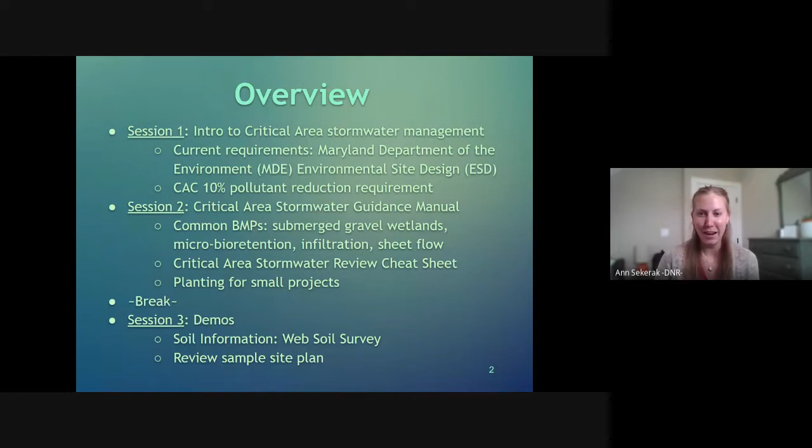Now we're going to jump into the first session, which is an introduction to critical area stormwater management. Really quickly first, we'll take a quick look at MDE's stormwater management requirements, also known as environmental site design to the maximum extent practicable, or ESD to the MEP. Even though MDE's requirements are separate from ours, we wanted to briefly touch on them because critical area stormwater management was designed to be consistent with them.

So here we go, I'm just going to go into MDE's website here. This is their stormwater management webpage, and I wanted to point out a few things. Maryland's first stormwater management law was passed in 1982 and mainly focused on controlling flooding associated with new development. The prescribed structural BMPs designed back then were meant to trap large amounts of runoff in a central area. However, over the years, it was determined that incorporating multiple smaller scale practices was more effective.

The Stormwater Management Act of 2007 established environmental site design to the maximum extent practicable, again ESD to the MEP, to require the use of small controls to mimic natural hydrology and limit the use of structural practices. Here you'll see links to MDE's regulations, as well as a link to their stormwater design manual. So there's some really good resources here on their webpage.

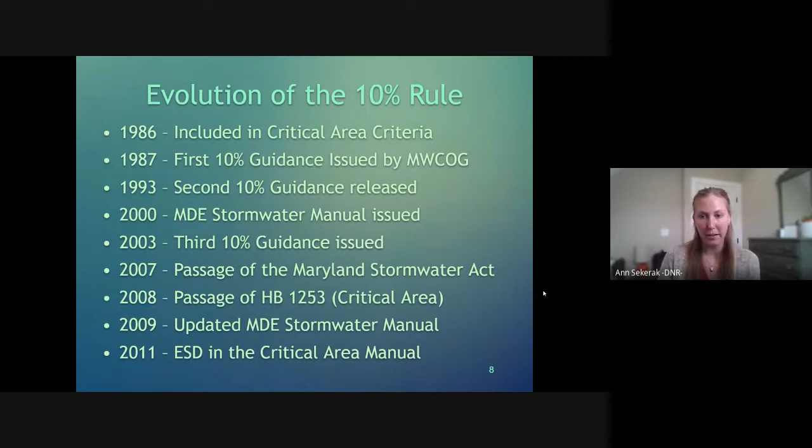So in terms of the interface between MDE and critical area requirements, there are times when one or both standards must be met. For example, as we've mentioned, critical area stormwater is required for projects in the IDA under 5,000 square feet, even though MDE stormwater is not triggered yet. When both are required, the best management practices, or BMPs, should be designed to meet MDE's ESD requirements. If the phosphorus load removed from the ESD practice is greater than the 10% pollutant reduction requirement, then the 10% rule has been met. Otherwise, additional or alternative practices may need to be implemented.

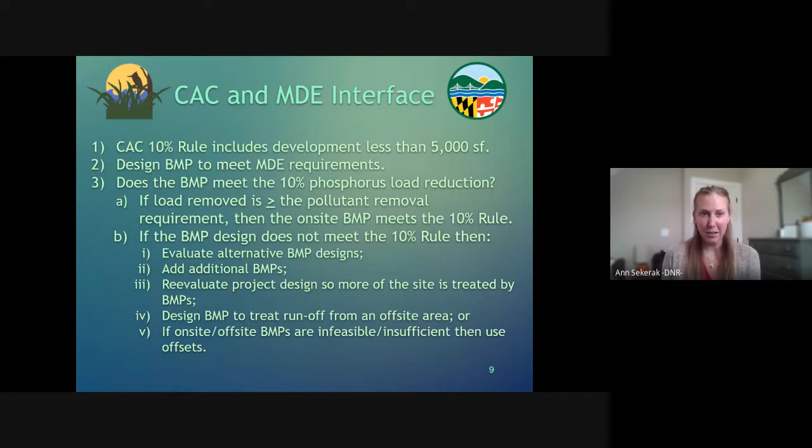And then just to keep in mind, BMPs should be part of the overall design of a project, not just an afterthought. It can be really difficult to incorporate stormwater management to meet 10% after a project is completely designed. And then also make sure that the 10% spreadsheet is filled out and submitted for any project where critical area stormwater is required, even if the removal requirement is met with ESD, because it serves as verification that the critical area requirement has indeed been met. And we'll get into more detail about that spreadsheet in a bit.

So in addition to the overall 10% pollutant reduction requirement, there's an additional requirement for redevelopment. MDE has specific requirements in COMAR for redevelopment called Impervious Area Requiring Treatment, or IART. It basically specifies a 50% reduction in impervious surface below existing conditions. Because it's typically impractical to actually remove 50% of existing impervious, environmental site design practices, or ESD to the MEP, can be used to meet the equivalent in water quality control of a 50% decrease in impervious surface. This redevelopment requirement provides a way to address existing untreated impervious area.

And so, to be consistent with MDE, the critical area also has a redevelopment requirement, but it's related to phosphorus removal, not impervious surface. So the 10% spreadsheet, which again, I'll get into more detail in the next slide, automatically calculates the average annual pre-development load based on whether the project is new development or a redevelopment site. Redevelopment rules apply if the existing site is more than 40% impervious cover. The phosphorus removal requirement for redevelopment sites is to reduce the pre-development phosphorus load by 50%. But again, this is automatically calculated when you enter the information into the spreadsheet.

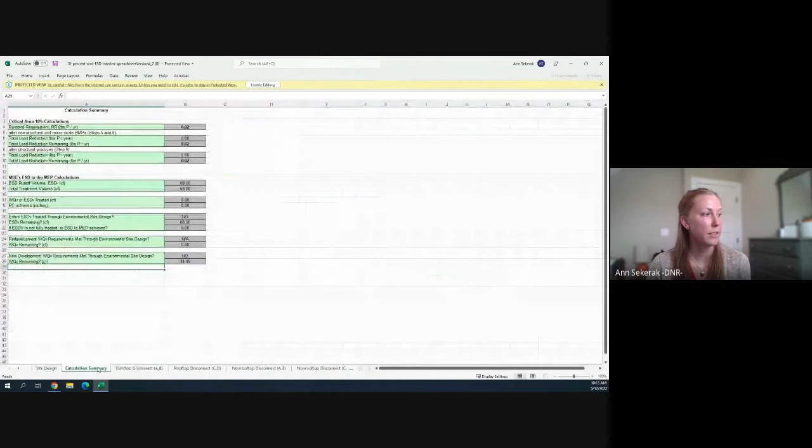So here we are, and let me see if I can zoom in a smidge. So again, this is our spreadsheet, the 10% pollutant reduction spreadsheet, and the blue cells are the cells that you input information. So that's what you fill out. The gray cells are automatically populated with formulas. And then down here, you'll notice that there's various tabs. So the second tab down here is a summary tab that just provides a quick snapshot to see if the reduction requirement has been met.

And then there are these various other tabs down here for the different types of best management practices or BMPs that you may be considering using on a site or that you're using on the site, and you have to insert those specifications for that specific BMP. This spreadsheet enables designers to find the most cost-effective combination of ESD practices that comply with ESD and this critical area 10% requirement. And it adjusts the effectiveness of proposed ESD practices based on the individual BMP specifications.

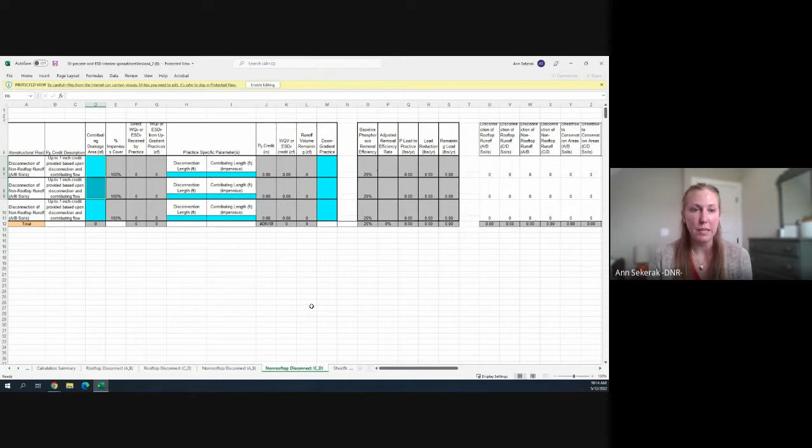So that was just a really quick overview of it. But again, we're going to get into more detail and go through some examples later on today.

All right. And so as an alternative to on-site or off-site BMPs, some jurisdictions have a fee in lieu program for stormwater management. The current fee in lieu rate is $35,000 per pound of phosphorus. The Critical Area Guidance Manual has a different amount, but that's from 2011, and MDE has since updated that value to be $35,000 per pound. And you have to set up a program to manage, track, and implement fee in lieu, and that account has to be separate from any other fee in lieu accounts that you may have in the county.

And then also the Critical Area Stormwater Management Manual on our website has guidance for the use of planting offsets, but we'll get into more detail again about that and the guidance manual itself in the next session. So that is it for just a quick, very large overview of critical area stormwater management and MDE's ESD requirements. Are there any questions before we move on to the next session?

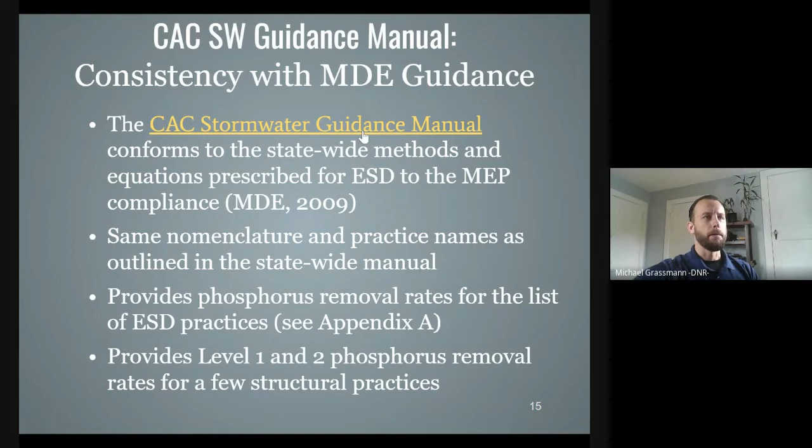I'm going to attempt to show you where this is located on our website. All right, so far so good. So this is our website, which you'll find in Critical Area. Once you get onto the landing page, you'll see on the left-hand side there are a number of different categories you can click on. Go to Stormwater Management, just like you did earlier when Annie was showing you how to access the spreadsheet. And then if you wanted to look at the IDA 10% Stormwater Manual, it'd be at the top of this column right here. And here we go. Environmental site design criteria for Maryland's critical area.

I'm not going to go through this in great detail, but I'll just go over quickly what you're going to find in this manual. So we have an introduction, which talks about the critical area and the buffer, evolution of stormwater management practices in the critical area, why this edition was created, and some of the differences between this and the 2011 edition. In part 2, a lot of the frequently asked questions on basic stormwater management design and policies will be addressed.

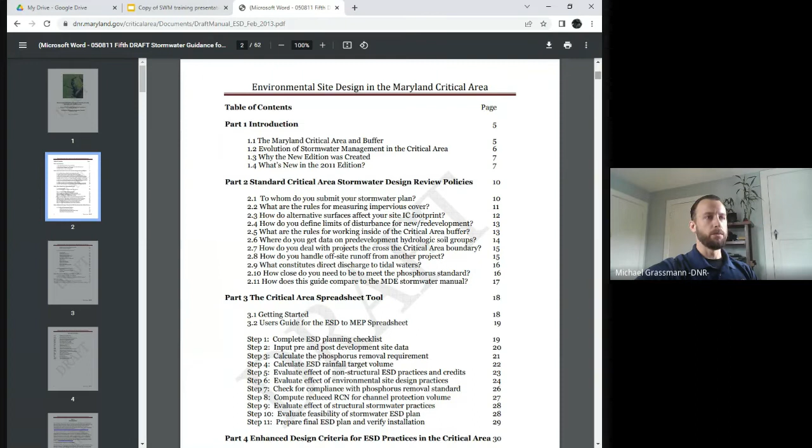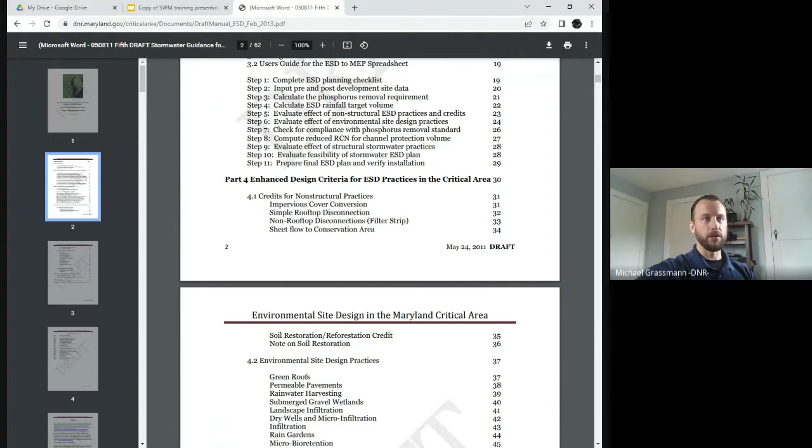Moving into part 3, we go into the spreadsheet tool, which Annie covered in the previous session. And part 4 talks a bit more about the actual BMPs and some of the practices and specifics that you're going to find on different BMPs in the critical area. Then part 5, as mentioned, goes into offsets and different offsite compliance that you can apply for stormwater management in the critical area. And references cited, the appendix that summarizes some of the phosphate removal rates for the critical area, and different documentations are Appendix A and B.

And as we mentioned earlier, if there are any questions at all as we go through this, especially as I start touching on some of the BMPs, we encourage interaction. So feel free to jump in on the chat or just raise your hand or just cut me off if I'm rambling.

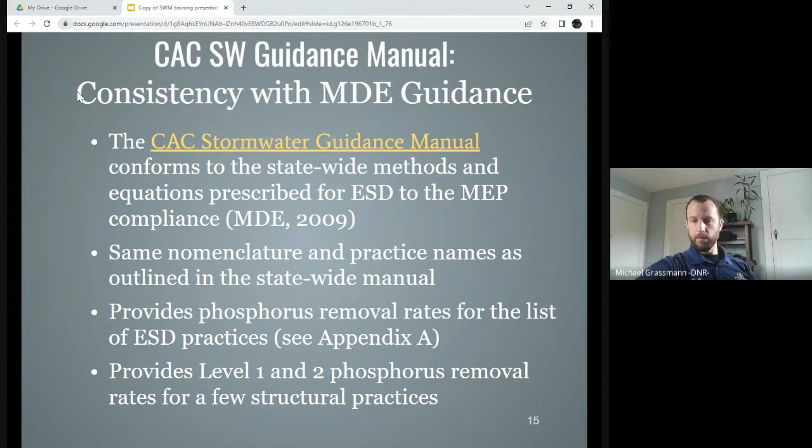Can we consider that guidance final? And Aaron had a question. Yes. So the 2003 guidance was our original stormwater management guidance manual, which was approved by the commission. The 2011 version, which is on our website, was never officially brought back to the commission for approval. However, it was updated basically to reflect MDE's change to environmental site design requirements. So the 2011 version is the best one to use because it reflects the requirements currently under MDE's Chapter 5, their ESD chapter.

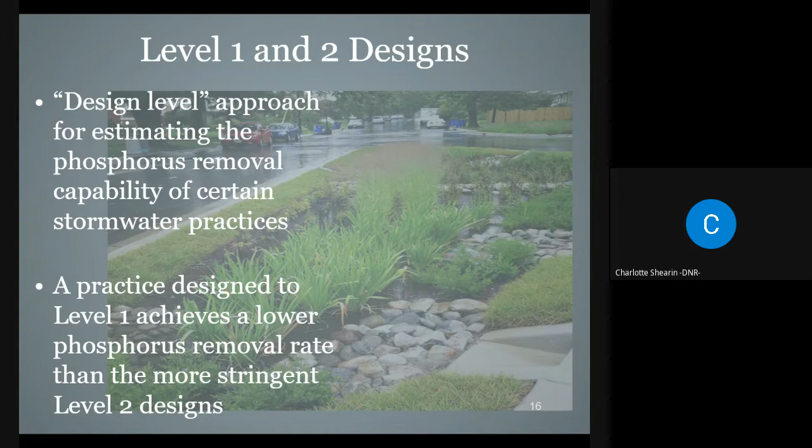Does that answer your question, Aaron? Yes, I believe so. The 2011 would be, yeah. Aaron asked if there was any conflict between the 2003 and the 2011, we should refer to the 2011 one. That would be correct, yes. Right. Sure. Cool. Yep. Great question.

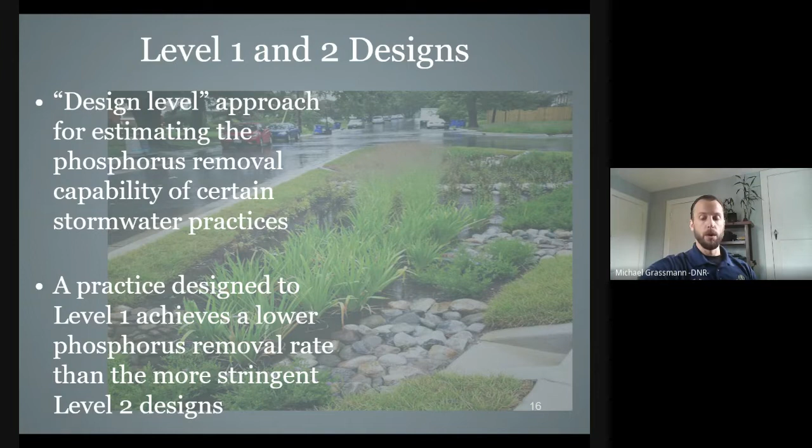Good question. So briefly touch on level 1 and level 2 designs. As mentioned on the slide, the design level approach is for estimating phosphate or phosphorus removal capacity of certain stormwater management practices. Level 1 achieves lower phosphate removal, and level 2 has more stringent design capacity. We're just touching on this. This is generally something that planners will not come across, but it is mentioned in the stormwater manual, so it's something that we wanted to just touch upon.

And again, level 1 design equates to MDE's minimum design standards and criteria for environmental site design practices, while a level 2 design has a much more enhanced list of design features, which will maximize phosphorus removal. But once again, typically we won't see a level 1, level 2 design differentiation in a lot of the plans that come into our office for review.

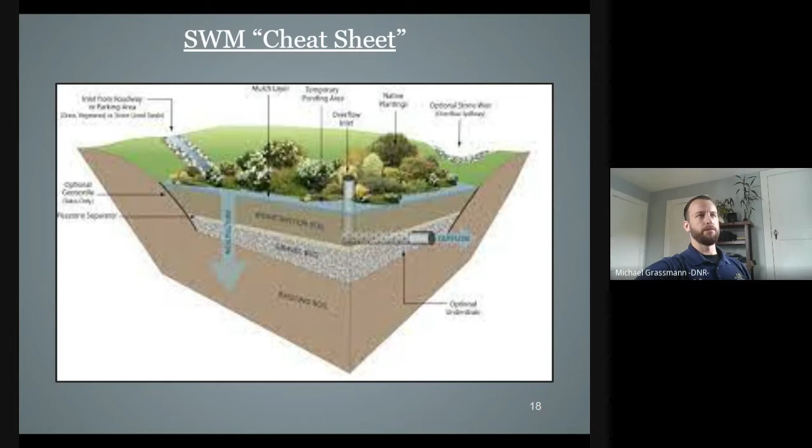So our stormwater cheat sheet. Now, this is completely separate from the stormwater guidance manual. And I believe, did this go out in the earlier email to everybody? Did we get that out, or are we going to send it out after this? Nope, it was included in Susan's email with the attachments. Okay. Yep. Excellent. So if people have this available, you're welcome to follow along, since there is a lot of information on this. And it is a very handy resource that Charlotte put together.

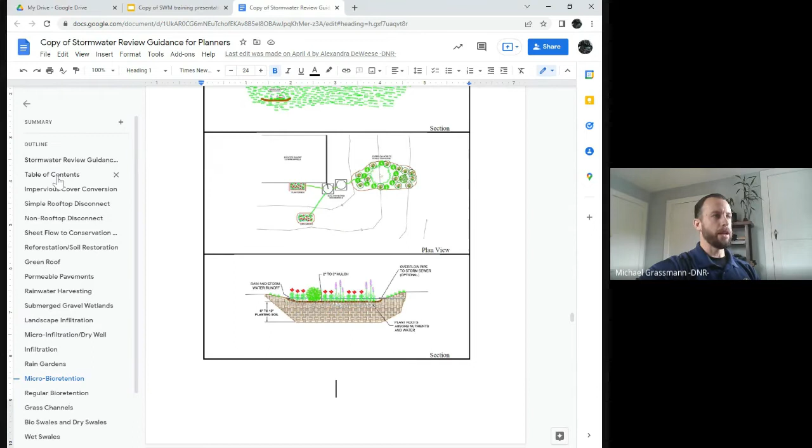I am not going to go into a huge amount of detail on all of this because it is very comprehensive, but it is a great resource if you're reviewing some plans. It is important to note that we are not stormwater engineers, right? This is one of the reasons why we have something like this.

Basically, if something like this comes into our office, this document will allow us to better review the BMPs in order to ensure they meet the specific requirements, because some of these BMPs do have very specific criteria in order for them to be effective and achieve what they're designed to do. So when going over some of these, it's important to look at this reference or resource and make sure that the BMPs being proposed are going to meet the specifications.

One thing you'll find that's common in most of these, there's a few criteria listed under each practice. You'll have environment or location, soil types it's best used for, construction specifications, things that it is recommended for, and definitely things to be aware of or that it is not recommended for. Those are typically highlighted in red or italics when you're going through this.

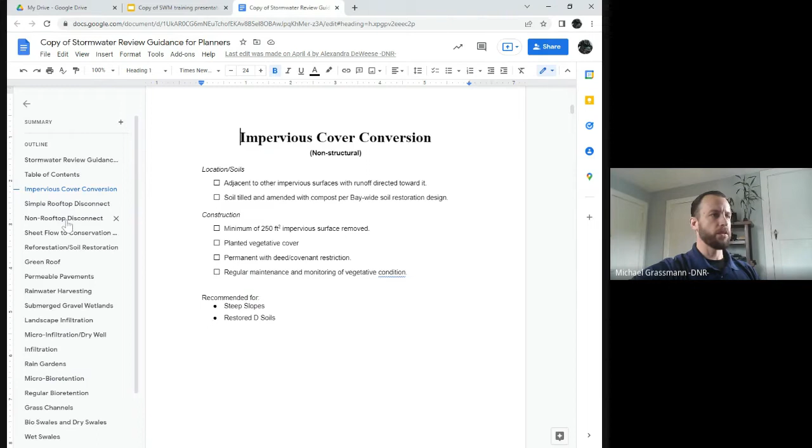I'm not going to really talk about the simple rooftop disconnect or the non-rooftop disconnects right now, because we'll go into that in a little bit more detail later on in this presentation.

So we'll start with sheet flow conservation area. It's highlighted here in the location information that tidal and non-tidal wetlands themselves should not be included in the calculation of the 20,000 square foot area and the 50-foot width requirements listed in the construction specs, because of lack of infiltration.

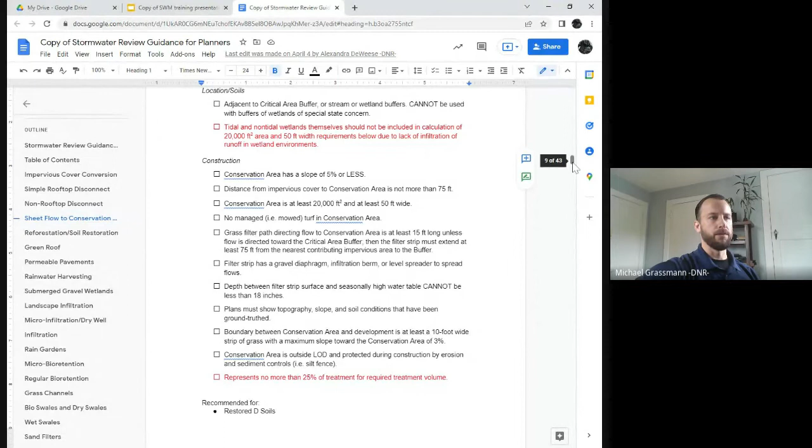Really important to pay attention to some of these specifications, because it talks about depth between filter strips, the fact that this cannot represent more than 25% of the treatment area for required volume, and is recommended for restored soils. So if it's not in the right soil type, this should not be applied.

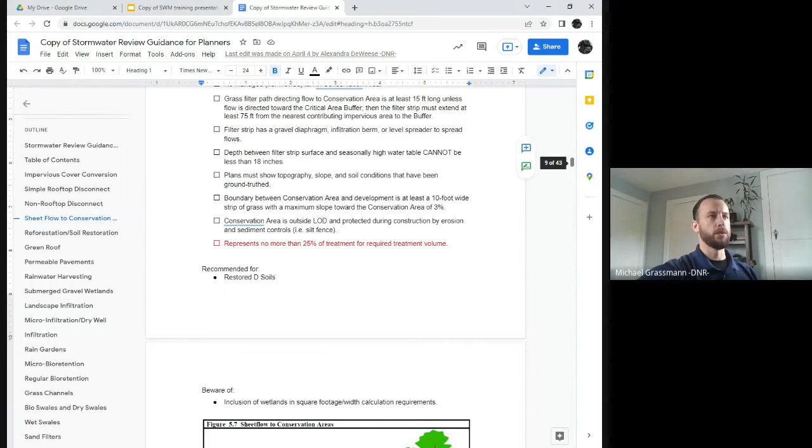There's a filter strip that should be part of the construction specs, with a gravel diaphragm, infiltration berm. So there's a lot that needs to go into this.

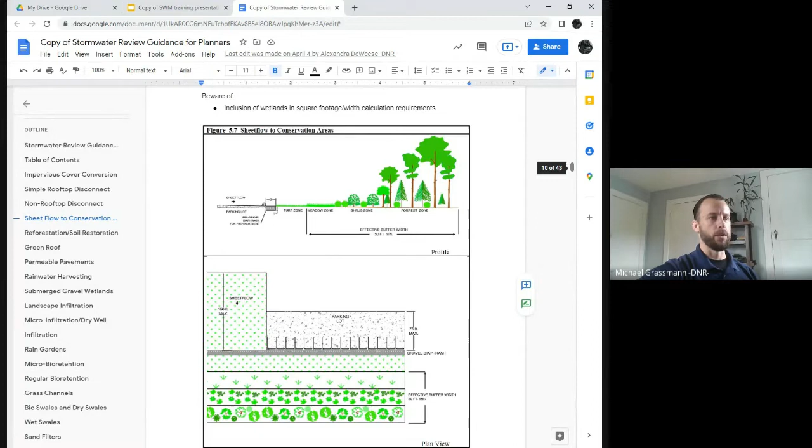Each one of these BMPs also has a very handy graphic to help further explain what it is best used for and how it's best applied. Sheet flow to a conservation area is typically something you'll see in a slightly more industrial area, where you'll have a large parking lot or whatnot, and a slope where this is going to run off into your effective area, and you must maintain certain buffer widths in order to make this effective.

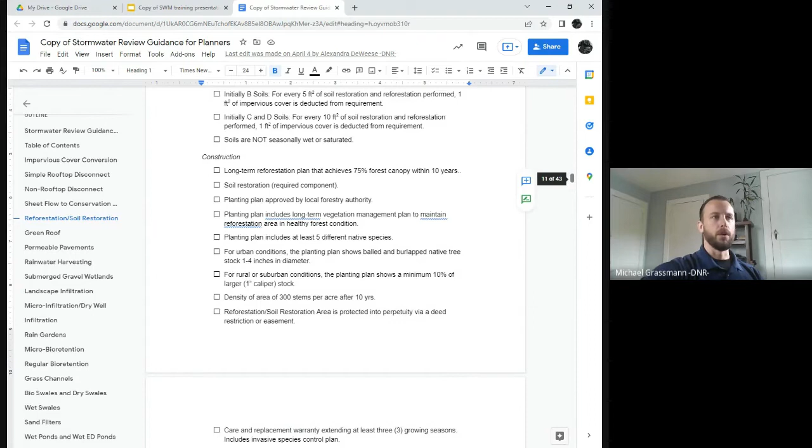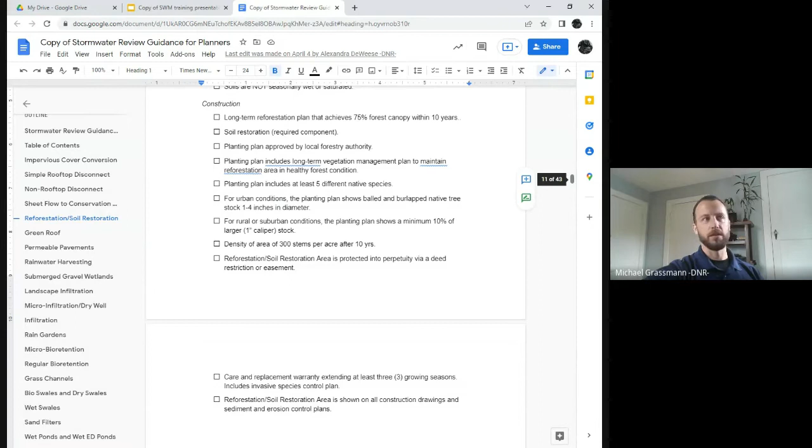So if somebody is going to propose this practice, it is very important to make sure that you're looking at these construction specs and making sure that they're meeting all of the monitoring, care, and replacement easements that would go along with reforestation for a stormwater management practice.

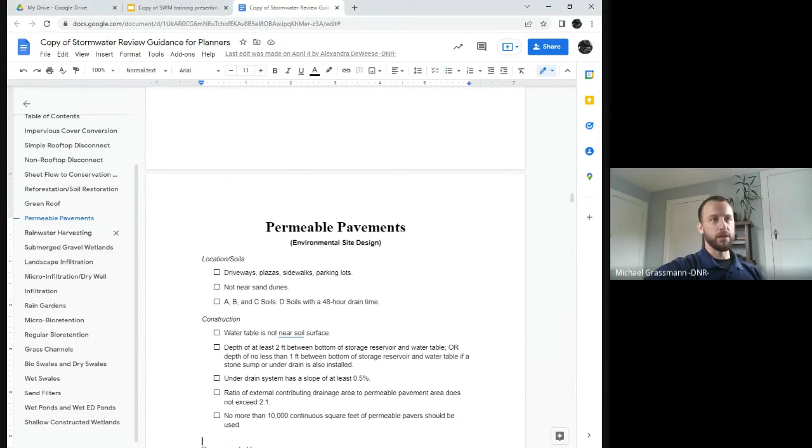Going to skip to permeable pavers, because that's something we do see quite often come in, or we suggest sometimes as a best management practice when people are having difficulties achieving stormwater management on site. It's very good for driveways, plazas, sidewalks, and whatnot if people can afford to put them in.

You have to be careful about what soils you're going to put them in, what the water table is for the area where they're going to be established. It's important to look at the ratio of the external contributing drainage area to the area of permeable pavers to be put in. It cannot exceed a 2-to-1 ratio.

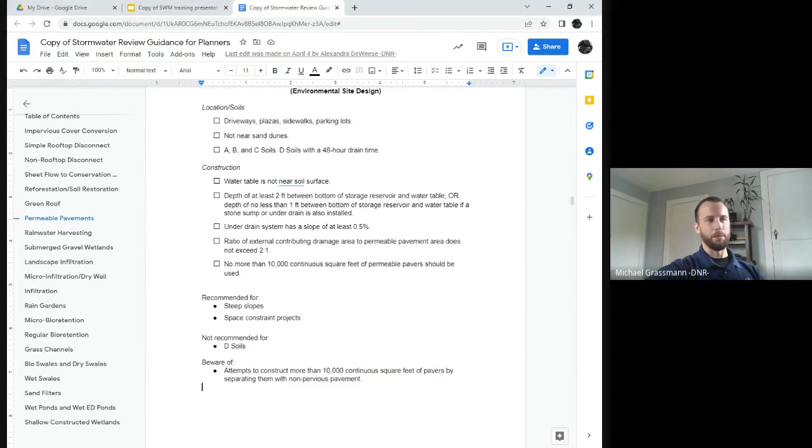Also, one of the cautions listed is that you can't have more than 10,000 continuous square feet of permeable pavers when putting this in. And you should be aware that some contractors may attempt to be clever by separating the 10,000 continuous square feet of pavers with a few non-pervious pavers or pavement in there. Examples of pervious pavers are listed.

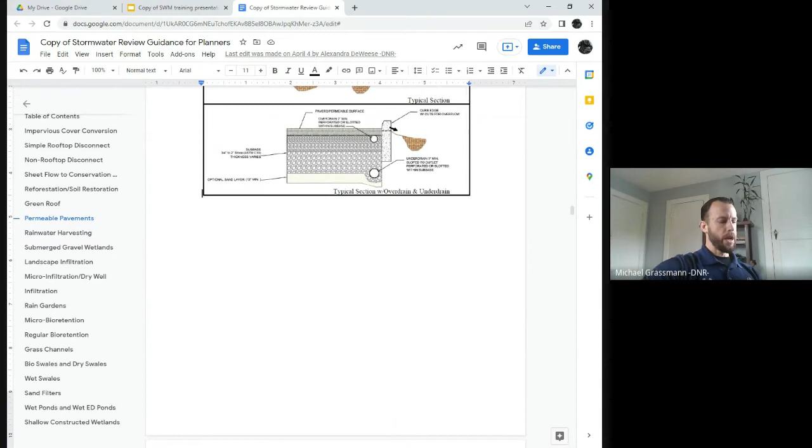Skipping over submerged gravel wetlands because this is another one I'm going to go into a little bit more detail on in future slides.

All right, all over the place here.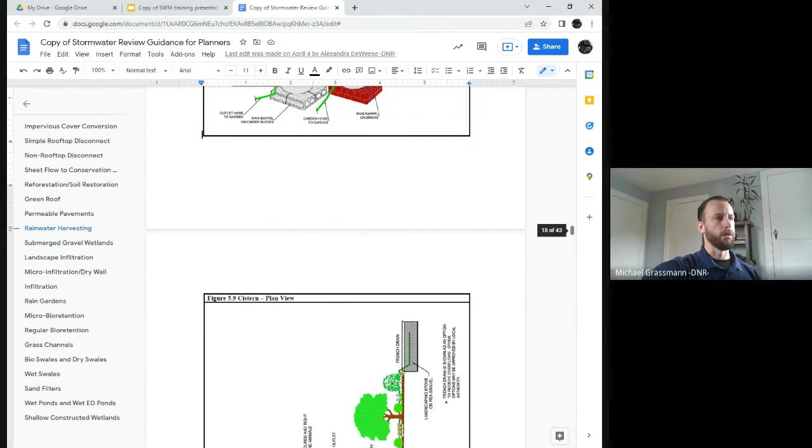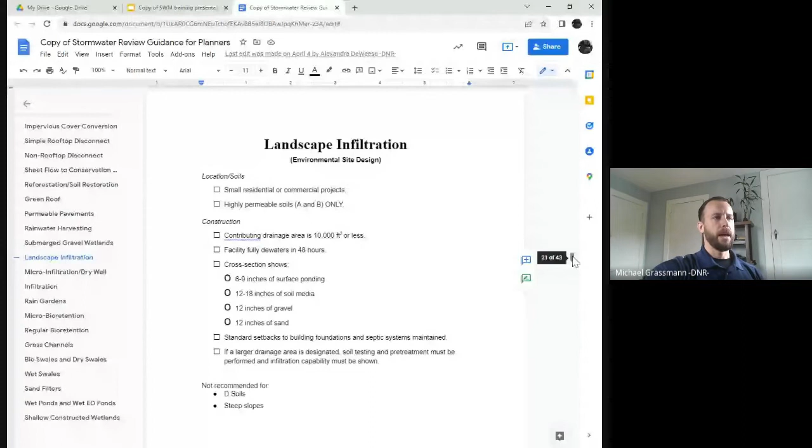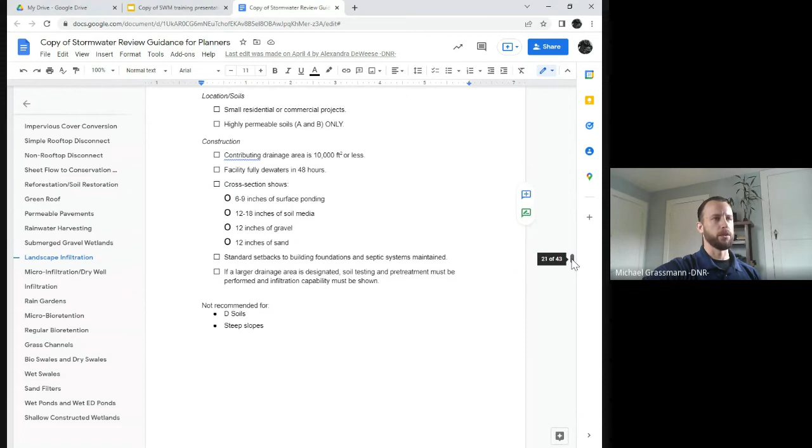Landscape infiltration, again, is something that's recommended for small residential or smaller commercial projects, and it has to have highly permeable soils to be effective. One of the important things to consider here are the different media and layers you're going to have in order to make this an effective BMP in terms of surface ponding, soil media, gravel, sand, etc. So if you do have a plan like this come across your desk, please take some particular notes about this. You also have to have a certain minimum distance between where the home is going to be and where the landscape infiltration area is going to be.

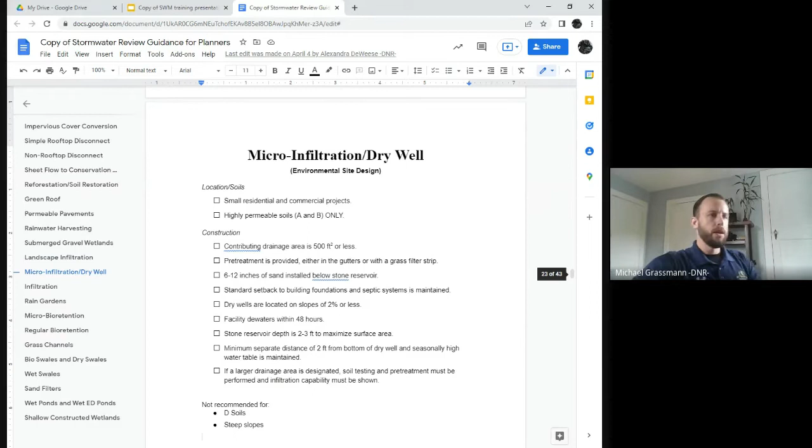Moving on to micro infiltration and dry wells, another small residential or commercial project area. Be aware of the contributing drainage area because it has to be less than about 500 square feet. There should be some pre-treatment that goes along with it, either through gutters or a grass filter strip, and some media installed as a reservoir. We have a good graphic here with your rooftop runoff and the splash block that goes into it.

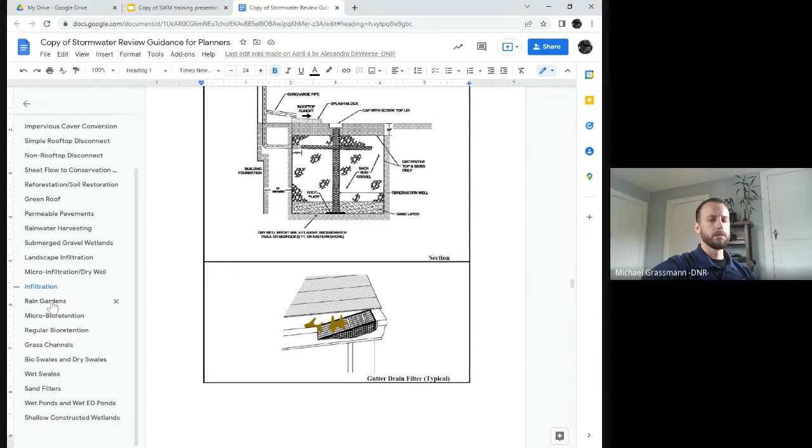We're always a big fan of rain gardens. It's a great environmental site design practice to put in. One of the things that's really important to highlight about rain gardens is that there needs to be information conveyed about this, especially if the property changes hands. The coordinates of the rain garden should be recorded, and there should be some kind of covenant or right of way that goes along with it, because if this is a stormwater management practice tied to a property or residence, we want to make sure that if the property changes hands, the rain garden isn't just going to be removed because people don't like it or don't want to have it there. So it's not just an aesthetic feature; it is an actual BMP that needs to be kept and maintained.

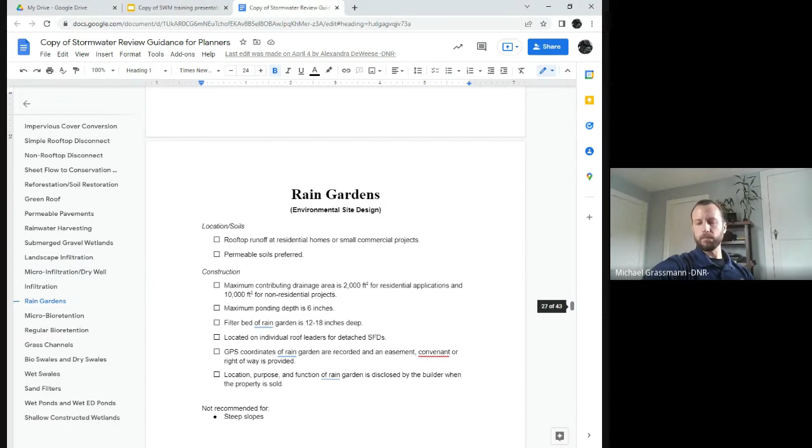Do people really, I mean, are other municipalities really doing a deed restriction on a rain garden?

There are various ways to handle it, including maintenance requirements on plats and things like that. But inspections related to stormwater management, I know, are difficult—jurisdictions don't necessarily have the manpower to go out and look at every single rain garden that was put in for a development project. But having at least notes on the plat related to what's required of the stormwater devices on site is at least one way to address it.

It looks like Aaron Harding from Cecil added in the chat that an inspection and maintenance agreement is required for the stormwater management ordinance, and inspections are required by the MS4 permit. Right, but that's under stormwater management guidelines.

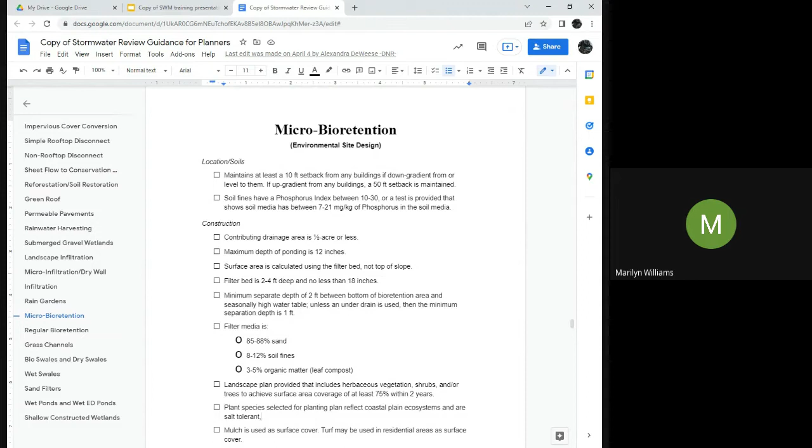So you don't have anything separate as far as a model stormwater agreement. We can use the same stormwater management agreement with MDE, but if you don't have a model to use—if you have a case where critical area stormwater is required but MDE stormwater is not—I think you could use similar plat notes and similar language to what's used for MDE requirements.

Aaron said that in Cecil, they would typically wrap it into the stormwater management plan review.

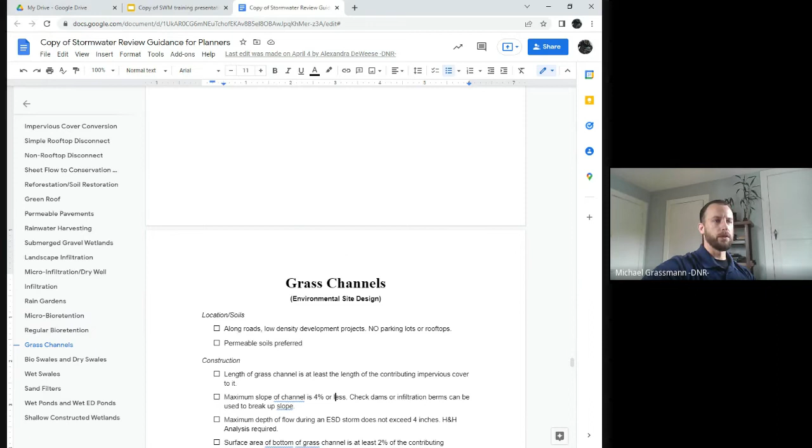I'm just going to go quickly over grass channels and swales. These are other BMPs we often see. A grass channel is seen along a road, in low density development projects. This should not be used for any kind of parking lot or rooftop. You have to have permeable soils here.

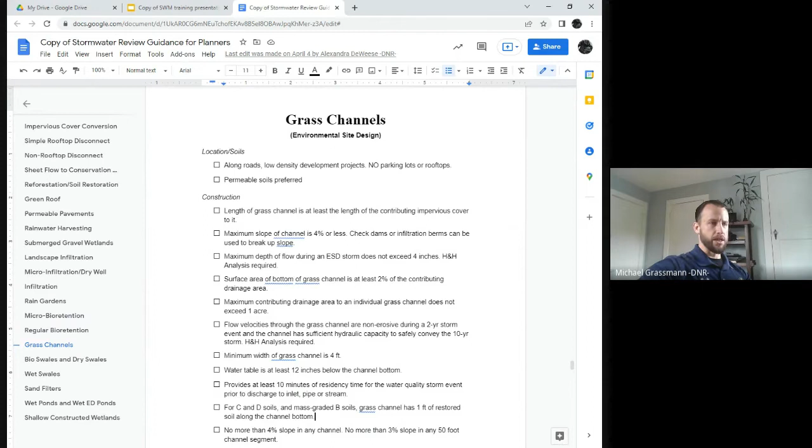Paying attention to the slope on all of these is very important to make it an effective BMP — maximum contributing drainage area, flow velocities. So it's a little more complicated than just digging a ditch and hoping that it's going to be effective as a BMP.

Once again, as shown earlier with some BMPs, this can only represent no more than 25% of the treatment area required for the treatment volume.

As we get into bioswales, dry swales versus wet swales, some of the major differences are in the environments these are used in. For a bio dry swale, very similar to grass swales, having filter media incorporated is one of the main differences. But you also have to look at ponding depth, maximum flow depth, slope, comparing the length of the channel in terms of the contributing impervious cover it's supposed to be treating, and having setbacks from residential roads.

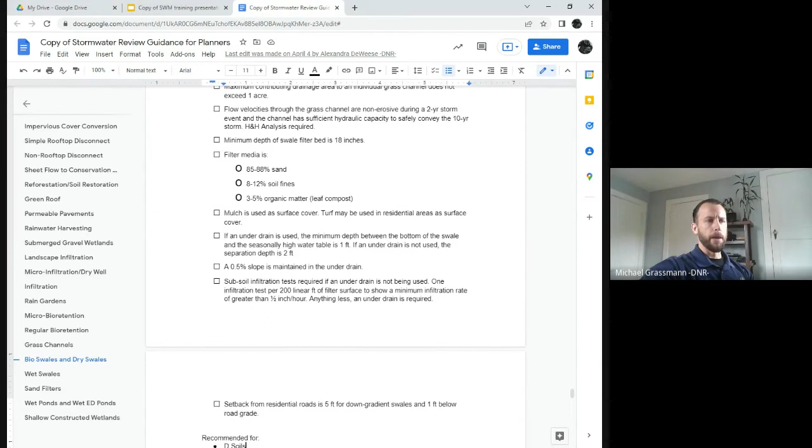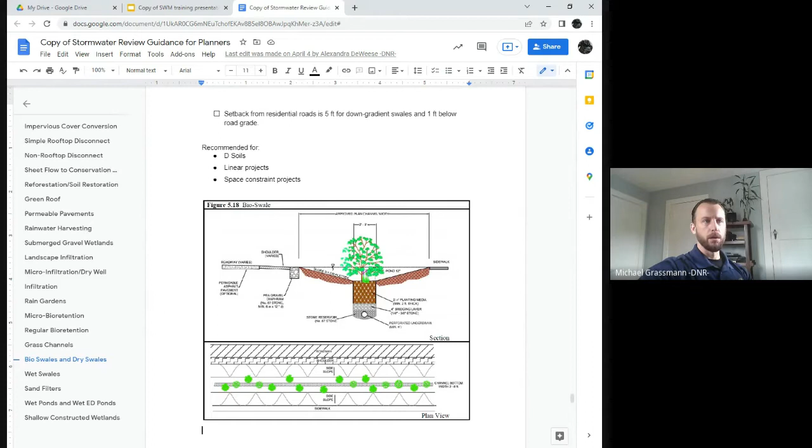The main difference for your wet swale is that it has a much higher water table. Again, this is for a non-residential area, and you have to pay a lot more attention to your surface drainage area and flow velocities through different storm events.

The last few BMPs covered in this cheat sheet are more conventional stormwater practices. Sand filters, you're going to see in contamination hotspots, brownfields, and redevelopment sites in much more urban areas that have groundwater contamination risks.

The wet ponds and wet extended detention ponds — we do not typically recommend them for practice in the critical area.

And then your shallow constructed wetlands, as a conventional stormwater practice, are something you're going to see in areas where the water table is much closer to the surface, so be aware of the different construction specs for those.

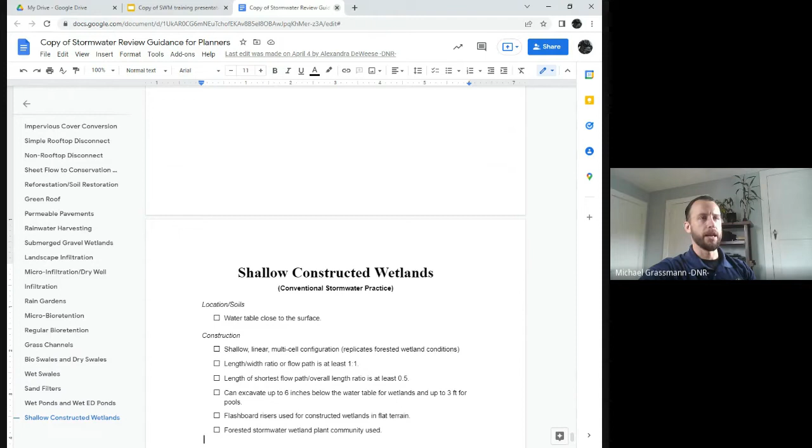I know it's a lot to cover very briefly, but hopefully you'll all be able to utilize this resource. If you have any questions or need more follow-up, feel free to contact your planner.

We wanted to highlight rooftop and non-rooftop disconnects in a bit more detail because it's a common practice that we see, and sometimes it's not applied as efficiently as it can be.

And Aaron has a comment in here: can't remember a situation where a stormwater practice had to be installed for IDA requirements that didn't also trigger stormwater review under MS4 permits.

Sorry about that, Mike. I missed it. Nope, the sound didn't go off.

Okay, so Aaron said, to be fair, he can't remember a situation when a stormwater management practice had to be installed for IDA requirements that didn't also trigger stormwater management review under the MS4 permit. He's going back to the conversation with Merlin, noting that he's thinking about cases where both MDE and critical area stormwater management requirements are required, as opposed to just critical area, not MDE. Thank you, Aaron, for adding that.

So again, just to touch on a couple of BMPs in a bit more detail, since we do see them frequently. Rooftop disconnection involves directing the flow from the rooftop downspouts into vegetated areas where it can soak into or filter over the ground. This disconnect from the sewer or storm drain system reduces the runoff and pollutants that are delivered into receiving waters.

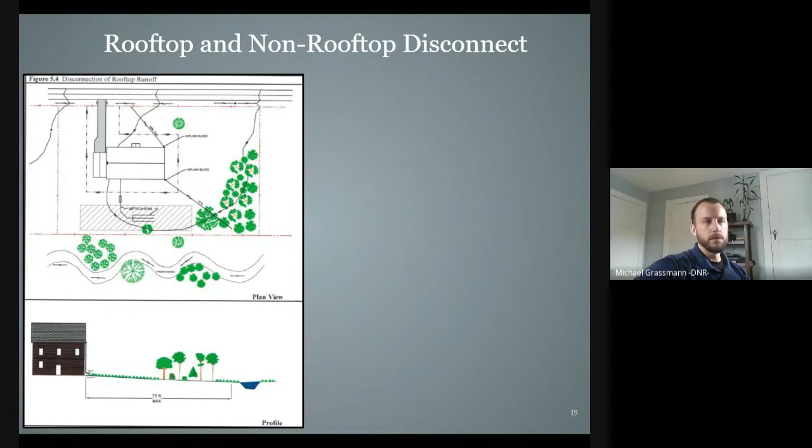There we go. I have a quick question. I think that the MDE requirements allow for 60 feet on the Eastern Shore. Is there any allowance for that in your regs?

Yeah, that's interesting. Charlotte, do you know? Yeah, we would follow MDE's recommendations for that. They do often have different Eastern Shore, Western Shore spec design requirements, so yeah, we would follow MDE's guidance on that. Is that typically because of soil infiltration or whatnot? Yeah, it's usually related to the soils or the water table.

Looking quickly at some non-rooftop disconnection. Disconnected non-rooftop areas involve directing flow from impervious surfaces, such as a large driveway, street, or sidewalk, into a vegetated area where it can soak into or filter over the ground. In this example, we have a parking lot where there is a transition strip into a sloped area that will then help to absorb the water with some vegetation and different media.

Hey, this is John Redden. I've got a question for you. Well, a comment first: the non-rooftop and rooftop disconnect we use all the time. In Somerset County, the houses are, I'll just say, average houses, not mansions, with tennis courts and pools and large impervious areas, so that works out great.

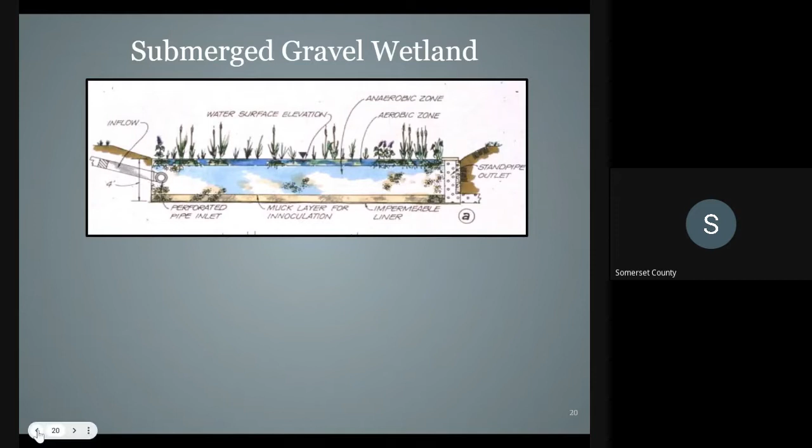But anyway, my question is, does a certified professional have to prepare these plans to be submitted, like an engineer or a surveyor? Does it have to be sealed or anything like that?

So we do not have a requirement for that in our regulations. I do not know if MDE does, I'm not as familiar with their requirements related to that. And I think it also differs by local jurisdictions, so it may be required by some counties and not others.

But I can look into that more, if there's anything in MDE's regulations. If you'd like us to do that, I'm happy to. Oh, Aaron is saying that MDE does require it. So Aaron, thank you, Aaron knows the answer. But like I said, we do not have that requirement, but that doesn't preclude a local jurisdiction from requiring it. Right, yep, good point, yep.

We normally do with stormwater, but I was just kind of thinking on the micro scale that we're talking about today, an individual house level or a small project, that doesn't quite make as much sense as a large one. Yep, yeah, and I mean with MDE, given that they require it, it might make more sense because they're looking at disturbance over 5,000 square feet, so they would be looking at larger projects than perhaps what we're talking about today. So yeah, okay, thanks, thank you.

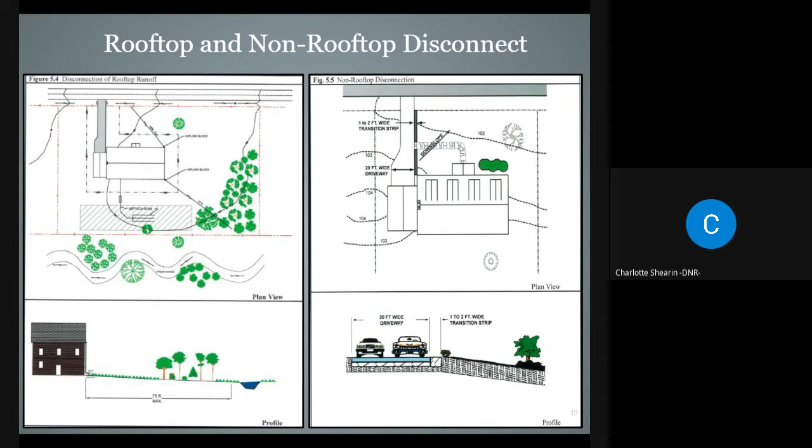Looking at submerged gravel wetlands, since this is another practice we see frequently in this design. The runoff flows through the rock filter and wetland plants at the surface. Pollutants are removed through biological activity on the surface of the rocks, as well as pollutant uptake by the plants. This practice is fundamentally different from other wetland designs, which behave like ponds with differences in grading and landscaping, because the submerged gravel wetland actually addresses pollutants through aerobic and anaerobic activity.

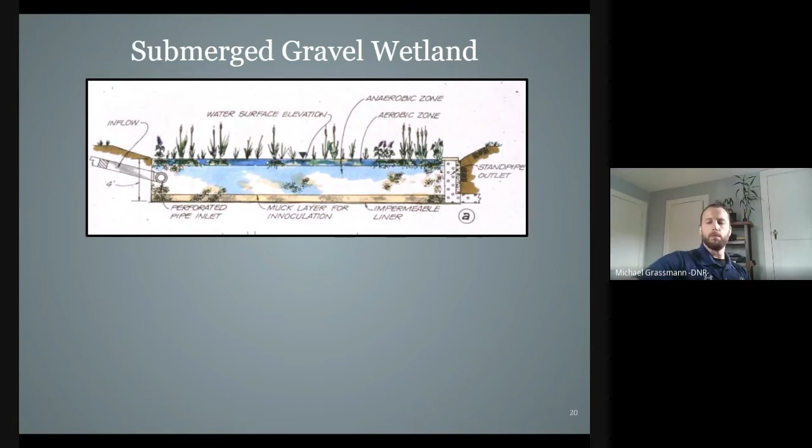It's kind of like a mini wastewater treatment plant in here. So making sure that all the various layers and filter media are meeting the specs is very important to ensure that this is going to be a functional BMP. And this is what it would look like in practice.

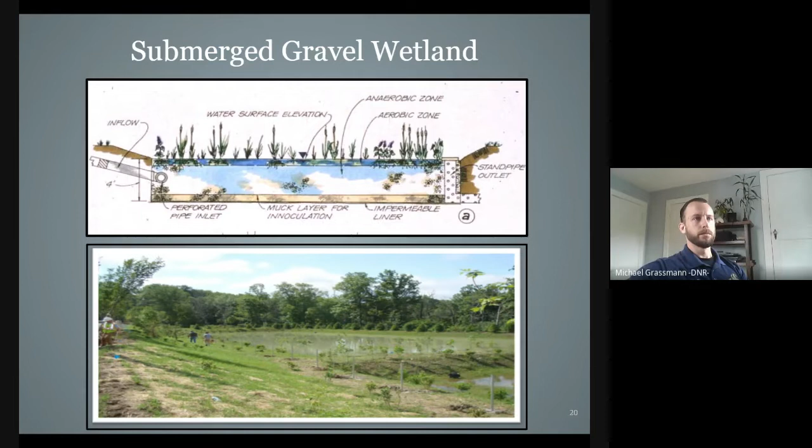Any other questions on some of the BMPs that we went over? I didn't want to go crazy with all of it. I know I spent some time on stuff, but before we move on to the last portion of this, are there any more comments or questions on the various stormwater BMPs we touched on?

So to talk about stormwater and critical area buffer zones, that is one of the HPAs we are most concerned with. In general, stormwater practices are not permitted in the buffer. There are some exceptions in terms of buffer management areas. If you have a planted BMP and it's kept outside your setback, whether it's a 25 or 50-foot setback, as long as that practice is outside of that, it could be allowed.

Stormwater pipes and outfalls are allowed to cross the buffer, but they must discharge into open water. And it must be at least 1 foot above the mean high water line to account for extreme tides and future sea level rise.

The buffer cannot be used for disconnection purposes, whether rooftop, non-rooftop, or sheet flow to conservation area. Again, there is an exception for this, if it meets a minimum distance: 75-foot distance between the closest impervious surface and the landward edge of the 100-foot buffer.

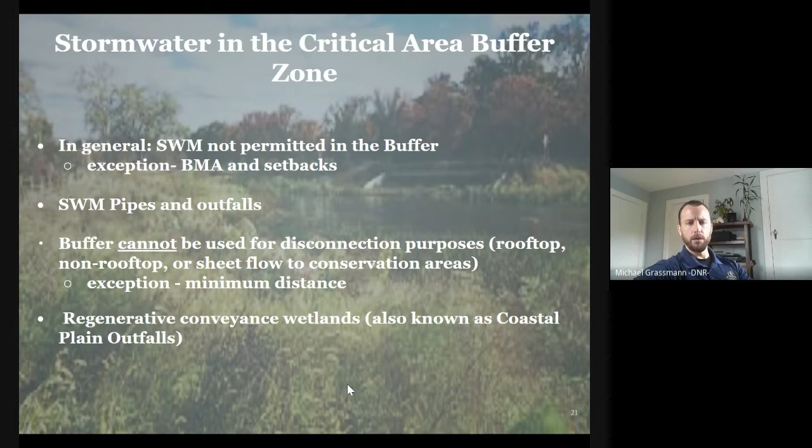Aaron's question was about MBAs, modified buffer areas. He asked, does that also apply to modified buffer areas? For which practice? For the disconnection purposes. I believe so, yes, it would.

BMPs within the buffer. So what Mike was saying earlier is that if you have a BMA area, you can put certain types of BMPs within the buffer, as long as they meet the setback requirements. They just have to be outside the setback.

Yeah, so this is Aaron again, it might be easier if I just ask the question. Sure. So in Cecil County, we have long linear lots, and in some cases there's a house that's in the modified buffer area closer than would typically be allowed. But installing a best management practice uphill is not practical.

If it triggers a stormwater management requirement, are you saying that a BMP cannot be placed in the buffer in those situations, and that pretty much eliminates any type of development that would have been allowed in that modified buffer area?

So in the modified buffer area, you can put a BMP within the buffer as long as it meets the setback for modified buffer areas, usually 25 feet or 50 feet from mean high water. And we would be looking at BMPs that are planted, like rain gardens, micro-bioretentions, submerged gravel wetlands, depending on the water table and soils.

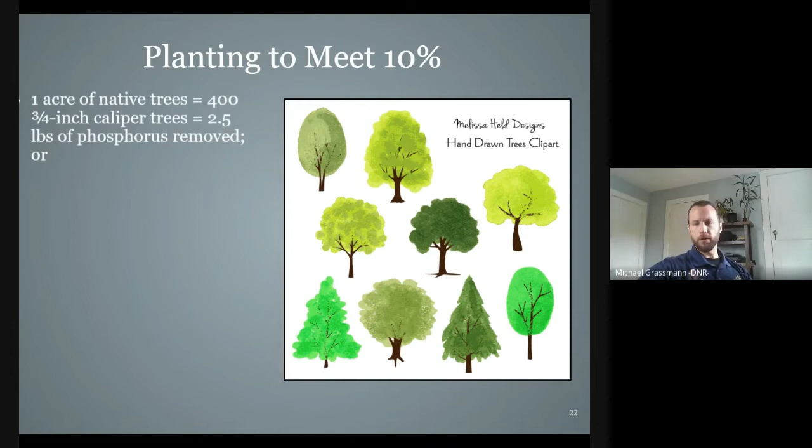As was mentioned quickly in Annie's earlier presentation, there is the option for planting to meet the 10% pollution reduction requirement. This is something we often encourage if you have a smaller project or some space constraints. There's a formula, it requires a little bit of algebra, but it's not really that tough.

So you have 1 acre of native trees, which equals 400 three-quarter inch caliper trees, and that essentially will equate to 2.5 pounds of phosphorus removed. Or to simplify it a bit, 100 square feet of permanent disturbance can be offset by planting one three-quarter inch caliper native tree.

This is only applicable for small residential projects where you have 2,000 square feet or less of disturbance. Again, if there's a larger commercial project or something like that, we can't really advocate to have tons and tons of trees, but this is a really easy way for smaller residential projects to accomplish their 10% pollution reduction requirement by planting.

In a brief example, a 10% requirement is 0.35 pounds of phosphorus per year. This equals 56 native trees. Essentially, you're going to multiply your 10% requirement by 400, then divide it by 2.5 to get the number of trees required. When I was doing some work with Brian Leitner recently in Charlestown, this was a way to satisfy some of their requirements for projects up there. So as long as it meets that requirement for a smaller project, it's something that we usually will turn to help satisfy the BMP.

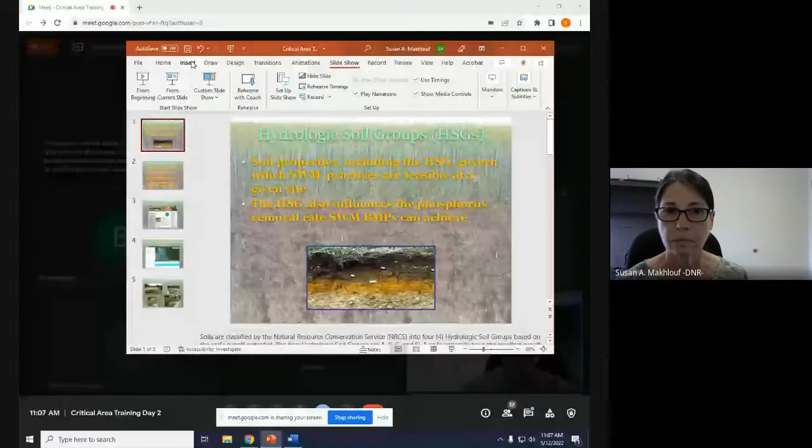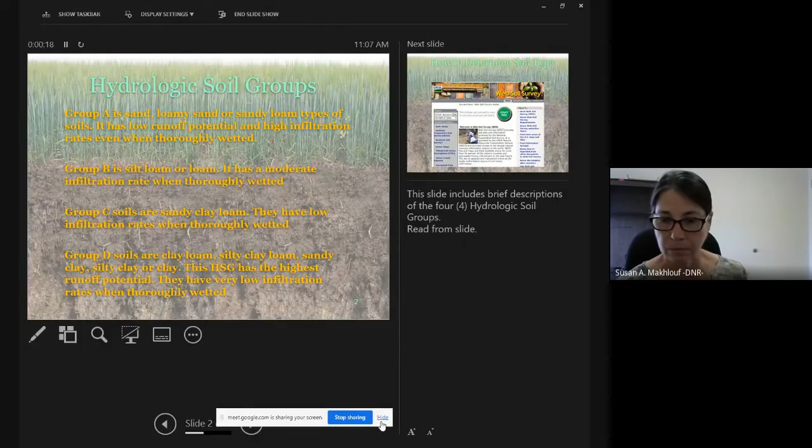Is everyone seeing the presentation now on their screens? Yeah, it looks like it's in your notes mode though. Okay, let me see if I can pull that. Let me stop sharing and see if I can. Is it still in notes mode? Oh, that looks good. Okay, now it's full screen.

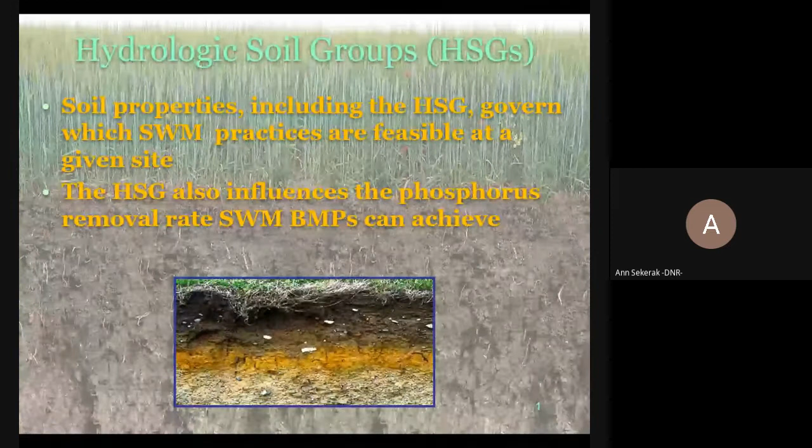Perfect. All right, so soils are classified by the Natural Resource Conservation Service, or NRCS, into 4 hydrologic soil groups based on the soil's runoff potential. The 4 hydrologic soil groups are A, B, C, and D. A soils generally have the smallest runoff potential, and D soils the greatest. So why are we discussing hydrologic soil groups during stormwater management training? Because soil properties, including the hydrologic soil group, govern which stormwater management practices are feasible at a given site. The hydrologic soil group also influences the phosphorus removal rate that stormwater management BMPs can achieve.

So during the previous session with Mike, you saw that the design specifications for various types of stormwater management BMPs included references to the HSG soil type. Generally speaking, BMPs that rely on infiltration to provide pollutant reduction, including microbioretention, sheet flow to conservation area, and permeable pavements, function at a higher level when located in soils with high infiltration rates, and these are the A-B type soils. Conversely, BMPs that rely on maintaining a continuously saturated layer to provide water quality treatment, such as the submerged gravel wetlands that Mike spoke about, function better in soils that have lower infiltration rates, and these are the C-D type soils.

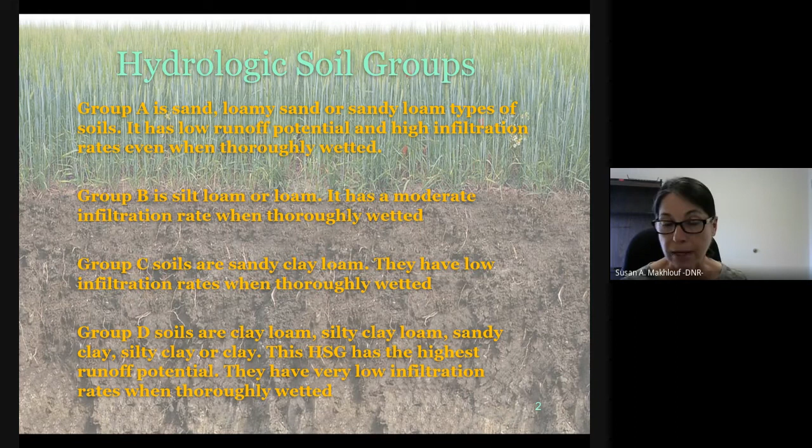And group D soils are the clay loam, silty clay loam, sandy clay, silty clay, or clay. This HSG group has the highest runoff potential and a very low infiltration rate. So since the C-D soils have low or very low infiltration rates, if infiltration type BMPs are proposed in C-D type soils, the pollutant removal rate is typically lower, and/or an underdrain must be included in the design. In addition, some BMPs are not recommended at all in C-D type soils.

So the Web Soil Survey provides soil data and information produced by the National Cooperative Soil Survey, which is operated by the NRCS. NRCS has soil maps and data available online for more than 95% of the nation's counties and anticipates having 100% in the near future.

And the first tab that you would use is the Area of Interest tab. On the Area of Interest tab, you would define your area of interest. So you could draw a rectangle or a polygon, which would include your area of interest for where you're trying to find soil data for. We were planning, again, to use the area of interest that Alex will be speaking about in her next presentation. But again, since we can't access the site, I guess we can't do that at this point.

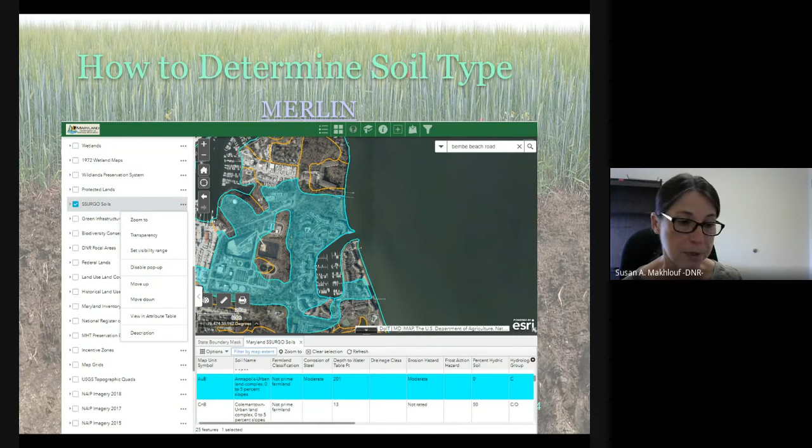So to summarize, the Web Soil Survey and SSURGO soils GIS layer can be used for general planning purposes. It is important to note that soil mapping is not an exact science, and hydrologic soil groups should be field verified prior to installing stormwater management BMPs. This can be accomplished by soil test pits, soil borings, and soil infiltration tests. And this is especially important for infiltration type BMPs that require specific infiltration rates to function as designed.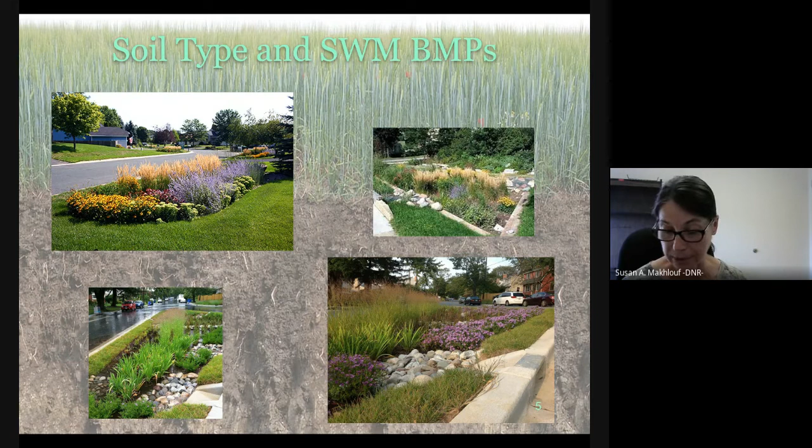So thank you for your attention during this overview of soil types. I guess if anyone has any questions before we turn it over to Alex DeWeese for a demonstration on how to review a site plan to ensure compliance with critical area stormwater management requirements. So if anyone has any questions regarding soil types, or if you've used the Web Soil Survey in the past and have any questions or comments about using it, or any questions at all about infiltration rates and how they affect various types of BMPs.

I've got a question. I know with the stormwater management side of things, when we have infiltration practices, we have the soil borings, like you said, and we require that from a geotech. Is it required for the critical area purposes to have a geotech perform the infiltration rates and everything? Yeah, so we would defer to the MDE stormwater manual as far as different best management practice specs and design criteria. So if there are practices that MDE is going to require that for, it should be done in the critical area just the same way.

Our 10% requirement works well in conjunction with MDE's requirements in some ways, and then it also is not as specific as MDE's requirements, I guess, is the best way to put it. Because, as Annie touched on in her presentation, our 10% requirement was written into our law in the mid 80s when our law was passed. And what MDE's stormwater is now, it was not that in 86. So as MDE's stormwater has morphed and changed, our 10% requirement, because it's in our law, has stayed the same, but how we've attempted to meet it has changed with MDE.

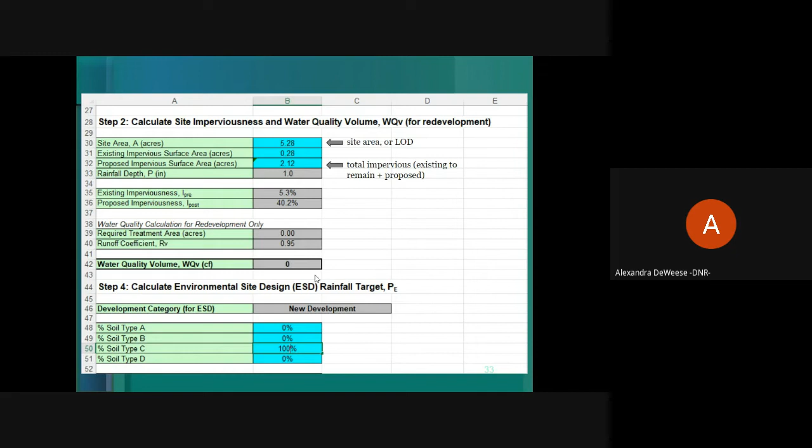Step 3 I'll talk about next, but that's where these numbers are being used to calculate what our 10% phosphorus reduction requirement is. I'm just going to skip to step 4 for now since it's kind of on the same view here. For step 4, all we're doing is telling the spreadsheet what type of soil we're working with, because it changes how efficient practices are and which ones are most appropriate.

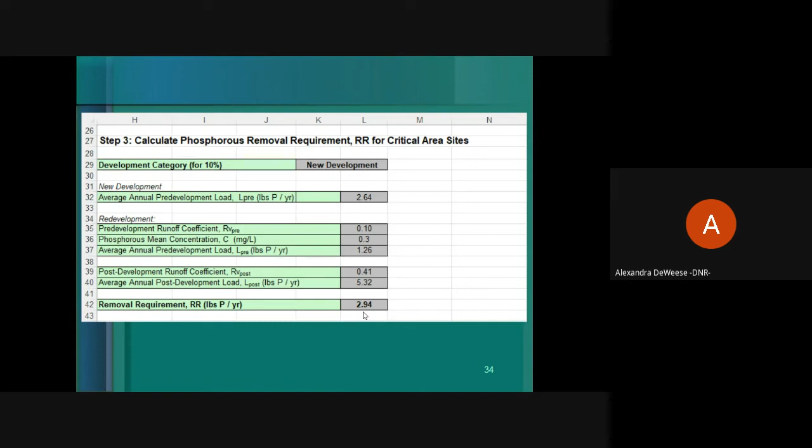So again, this is entirely soil type C. On the same page, but scooting over to step 3, you won't see any blue boxes because we don't have to do anything here. It's taken our site area information, done the calculations for us, and it's saying our removal requirement is 2.94 pounds of phosphorus per year.

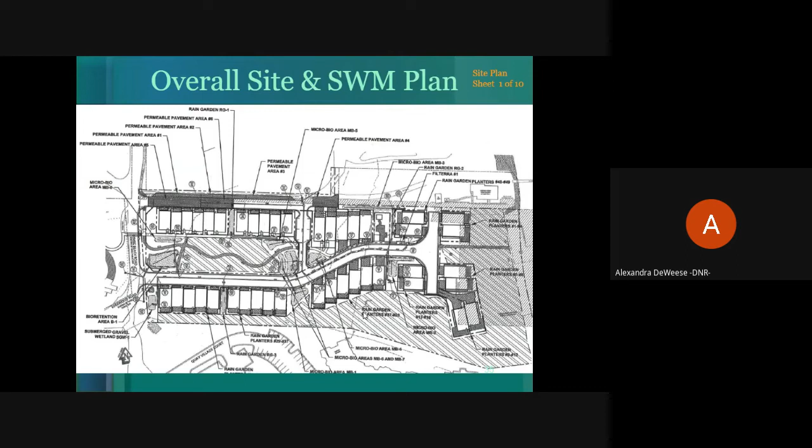So I should have mentioned this first, but obviously we're going to see plans that don't look like this. So you might have to dig a little bit to find this information, or ask the applicant specifically to provide it if it's not in there. But this particular plan that we were given not only had this drainage area map delineated like this, but then they had this handy and helpful chart for each of our microscale practices.

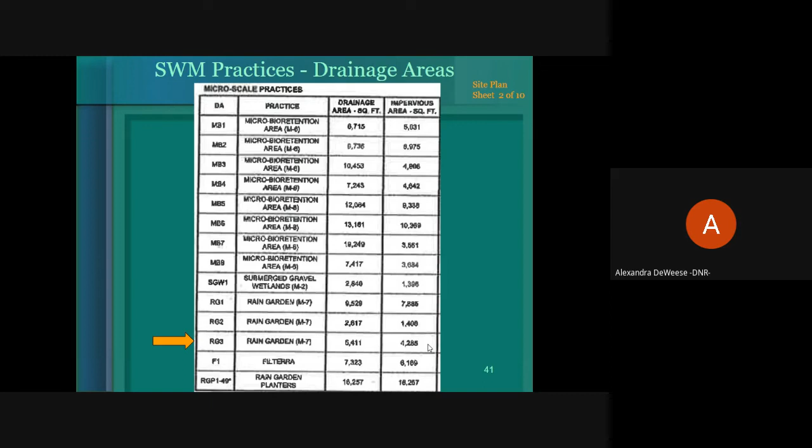Other things to note before we move on are that most of this is impervious. We've got part of the road running through this drainage area, a portion of some of the houses, but we do have a strip of pervious area. I think what the chart shows us is about 75% impervious. So we've got a drainage area of, I don't know, 5,400 square feet or so. I'll just simplify it that way. An impervious area of over 4,000 square feet. Again, that makes sense having looked at what was going on within that drainage area itself.

So if you're taking a peek at the site plans, this is on sheet 6 of 10. This is a rain garden cross section. Again, this is, I think, similar in function to a microbioretention facility in that it has plantings. There's media depth and ponding depth, as well as this sloped area that's leading to a depression that's intended to fill with water. But it's a lot simpler. We don't have like a sand filter around the whole thing or some sort of stone structure higher above the practice itself.

So specific parameters that we're looking for a rain garden include surface area, ponding depth, and media depth, or the difference between the bottom of this mulch layer and the bottom of the planting media itself. Because there are multiple rain gardens, so there are 3, they've kind of created this chart with each of these factors labeled with a letter.

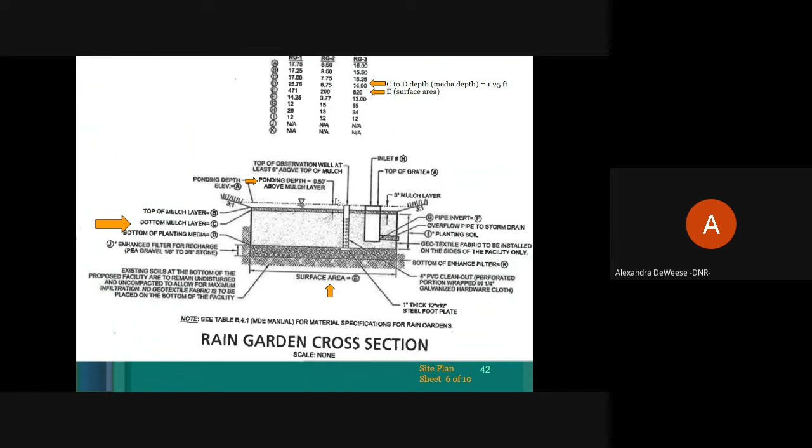So in this case, we're looking at rain garden number 3, if you recall from the drainage area map. We're most interested in the difference between C and D because that's our media depth, which here goes from 14 to 15.25 feet in elevation. So that's 1.25 feet of media depth. We're also interested in surface area, which this chart indicates the surface area of this particular rain garden is 620 square feet. As far as ponding depth goes, I'm pretty sure it's just generic across the board for this particular project of a 1/2 foot, as indicated right here.

So those are the practices I wanted to chat about for now. If you have questions about the other ones on site, we can certainly take a look at those tabs. I'm going to pull up a live 10% spreadsheet in a second, but what I wanted to show you next was the calculation summary tab.

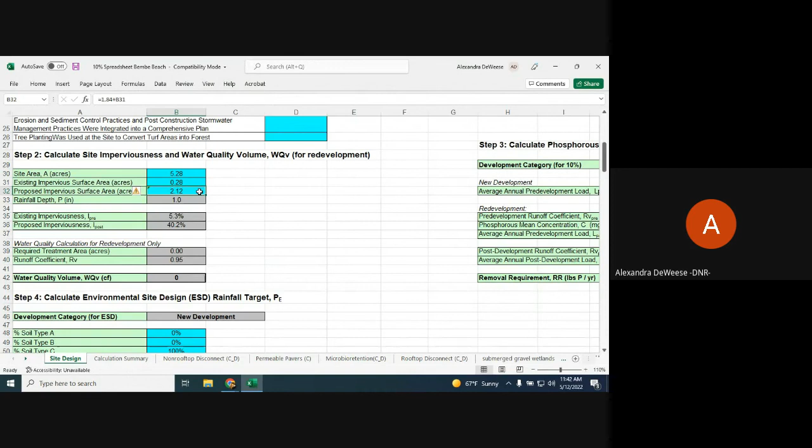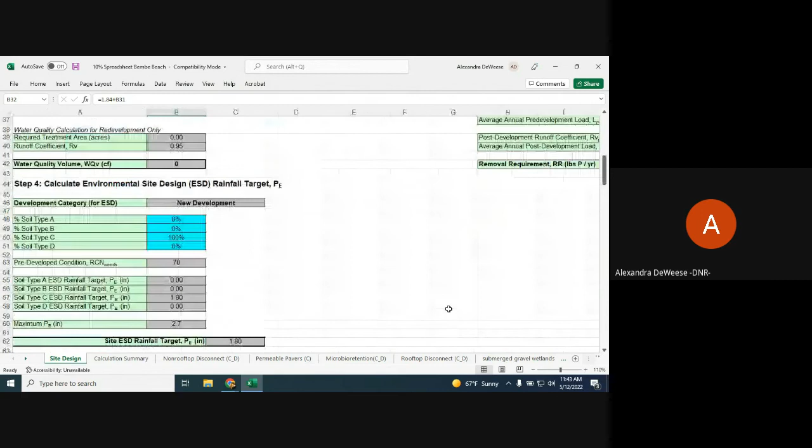I left these blank because it doesn't really affect the outcome of the spreadsheet. Again, we've put in step 2 our site area, existing and total proposed impervious, which spit out over here in step 3 that we owe almost 3 pounds of phosphorus per year. And then we had our soil type input over here.

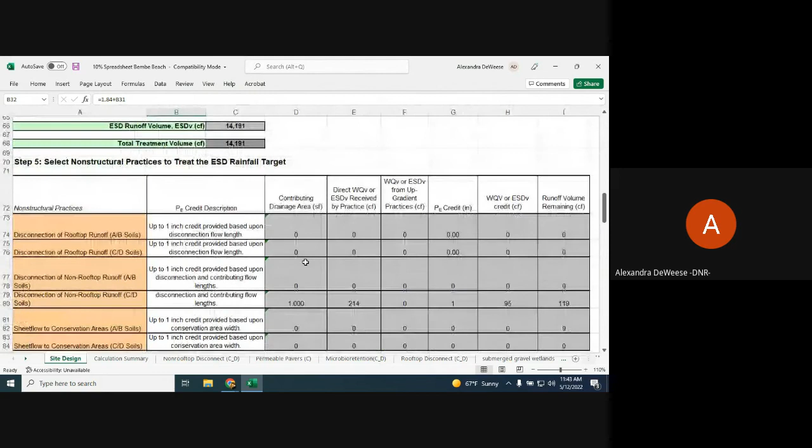Scrolling down, you're not going to see anything that you need to input again, but this is a summary of all the practices for this particular project. If you recall from the site plan, there's a whole bunch of them, and it doesn't list them individually, but it does accumulate them and tell us what the totals are. So we've got some non-structural practices here, disconnection of non-rooftop runoffs. It's telling us that total contributing drainage area was 1,000 square feet.

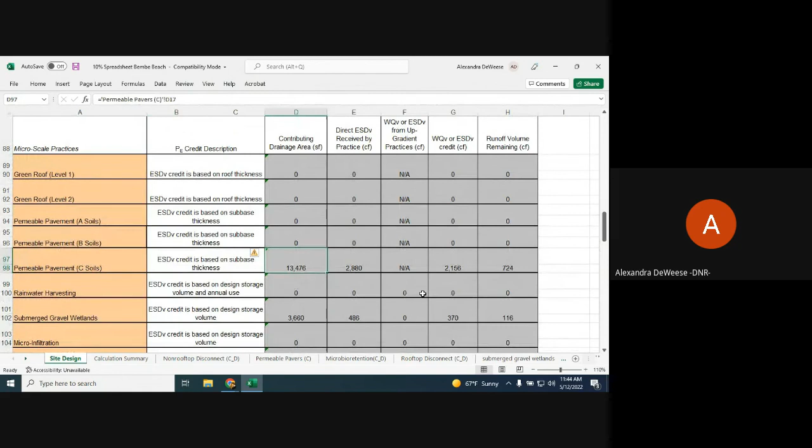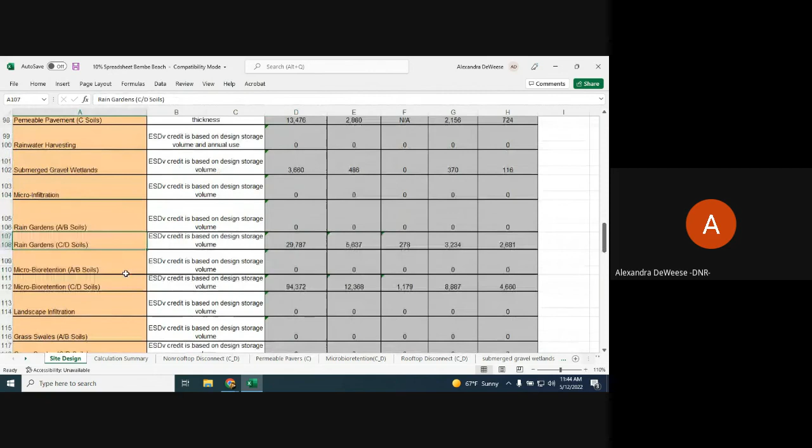We don't need to go through all of these, but I wanted to point out that if you were wondering what's going on down here, this is just a summary of all of the other tabs total. We've also got a total of over 13,000 square feet of contributing drainage area for all of those permeable pavers that we saw. We've also got a submerged gravel wetland somewhere, a bunch of rain gardens, and microbioretention facilities like we discussed.

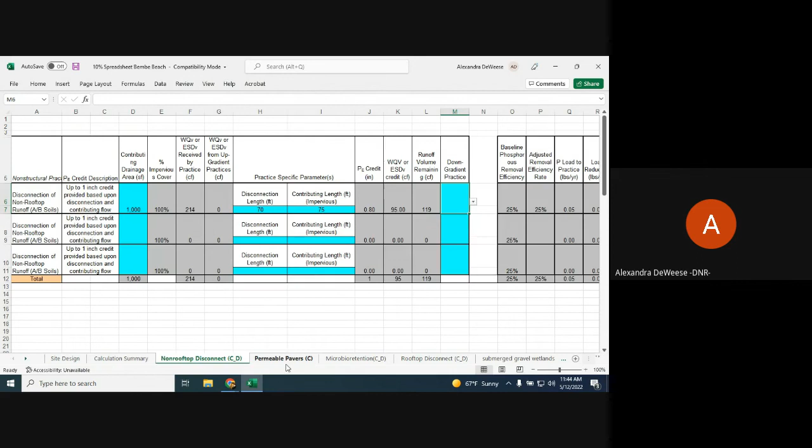Moving on, the second tab is our calculation summary. This is the one we literally just went over. Again, we can see what our requirement is, what's been provided by the practices proposed, and then how much is remaining, which for this one is nothing. And then these are all the different practices that this particular project proposed: non-rooftop disconnects, permeable pavers, etc.

I wanted to show you this one real quick, rooftop disconnect. There weren't any of these for this particular application, but we wanted to point it out because we talked about some Eastern versus Western Shore parameters for practices, and this one does have a tab, so you can input that information in there. Eastern Shore, Western Shore — I'm sure this looks very small on your screen right now, I'm sorry about that, but just know that that is in here, so it's factored in when it's applicable.

So yeah, these are all of the practices that we've covered. I'm going to go back into our presentation. At this point, we're hoping that we answered a lot of frequently asked questions, such as rules for measuring impervious cover and how permeable pavers and green roofs affect impervious cover.

At this point, we'd like to take any remaining questions you guys have. If there's something you want to look at again or in more detail, let us know and we're happy to dive into it. Otherwise, thank you for tuning in.

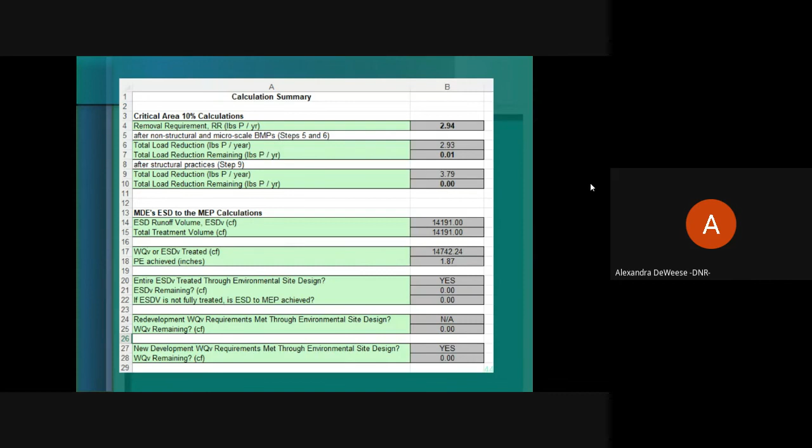Yes, I'm hoping that having been sent the examples gives you some guidance. If you ever have questions about completing one of these, or having an applicant complete one of these spreadsheets, I'm happy to take questions and walk through that with you. I'm sure some of our other planners are as well. Again, we're not stormwater engineers. There are some things that when I was pulling these slides together, I had to double check and question myself. So it's totally fine and normal if that is the same situation for you. It's not always straightforward or intuitive, but there's usually a way to get the information we need to complete this spreadsheet.